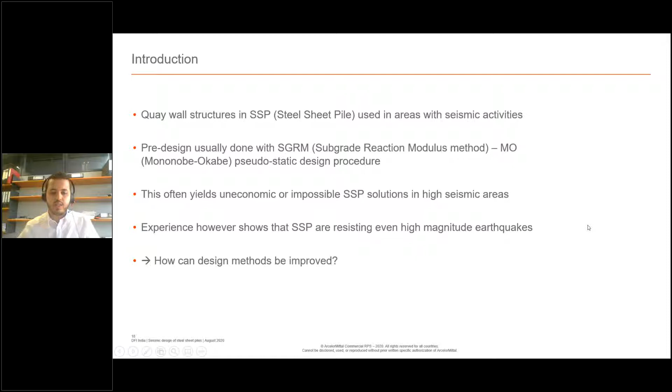I'd like to start with this success story in the port of Mejillones in Chile, constructed in 2004. This port structure was built after serious damage to the harbor installation of Antofagasta in the 8.1 magnitude earthquake in 1995. After this earthquake, authorities decided to construct the next port in the northern Mejillones Peninsula, and the breakwater was built using 8 circular cells, 24 meters in diameter and 24 meters in height, with a total breakwater length of 200 meters.

Also, one quay, quay 3, was built using the HZM sheet pile system with a total wall length of 620 meters. What we saw in the last years is that this port suffered no damage throughout a dozen very high seismic events. The most famous one was the 7.7 magnitude earthquake in 2007. The port suffered no damages, while surrounding concrete-based ports suffered heavy damages and were left in non-repairable state.

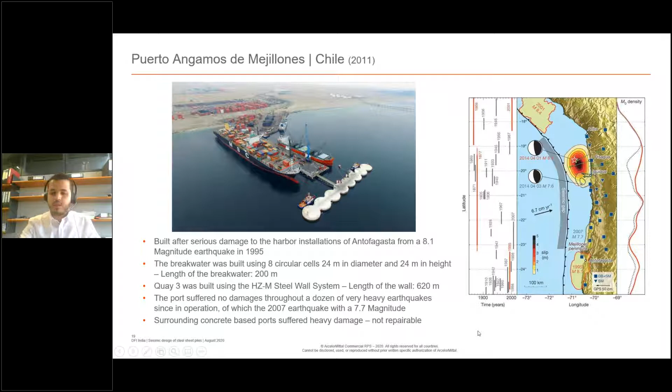This kind of return of experience is what encouraged us in this research to try to find the best design methods for sheet piles in seismic areas. So let me start with the design methods that we have today: mainly two, the pseudostatic one and the fully dynamic one.

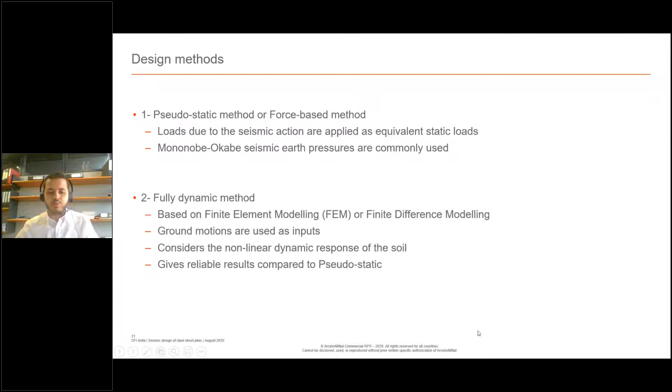In the pseudostatic method, the loads due to the seismic action are applied as an equivalent static load, mainly using the Mononobe Okabe seismic earth pressures. The fully dynamic method, however, is based on finite element modeling. We use ground motions as input, and we consider the realistic behavior of the soil using a nonlinear dynamic response. FEM in general gives more reliable results compared to pseudostatic, as we'll see later in the comparative studies.

Starting with the pseudostatic method: in static conditions, the earth pressure wedge is subject to acceleration of gravity only. In seismic conditions, we have an additional horizontal and vertical acceleration due to the earthquake, and we'll be more interested in the horizontal acceleration. The resultant acceleration is rotated by an angle theta related to the seismic acceleration. This method was initially developed by Okabe in 1926, and later by Mononobe and Matsuo in 1929, based on a modification of Coulomb's theory on earth pressures, known today as the Mononobe Okabe method.

Once we have this rotation of the model, we derive the earth pressure coefficients and apply the modified pressure for seismic conditions. To get this theta value, or equivalent rotation, we need coefficients kh and kv. We'll be more interested in the horizontal one, kh, because that impacts retaining walls more.

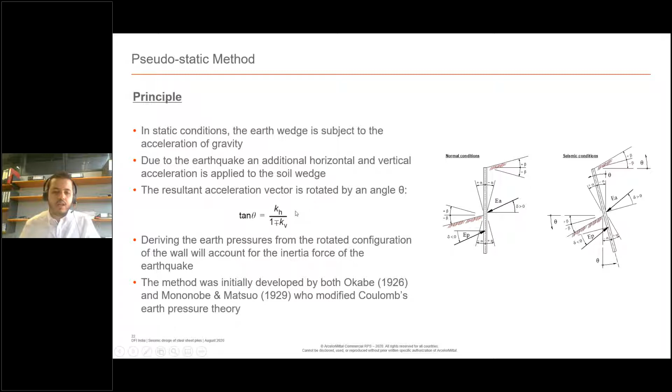And this is what is called the seismic coefficient. So to determine the seismic coefficient, we need to consider a particular standard.

Starting with the PIANC working group 34 recommendations, we have here a graph of some earthquakes and their equivalent seismic coefficient kh. If we look at the boundary below 0.2g acceleration, we have this line that describes the kh very well.

So below this bound, we just have the ratio between the seismic acceleration and the gravity acceleration. If we go beyond 0.2, we have a more complicated formula, but in the PIANC recommendations, we have an average value of 0.6 multiplied by the ratio between the seismic acceleration and the gravity acceleration. So this is basically the formula we use if we want to do our design based on PIANC recommendations.

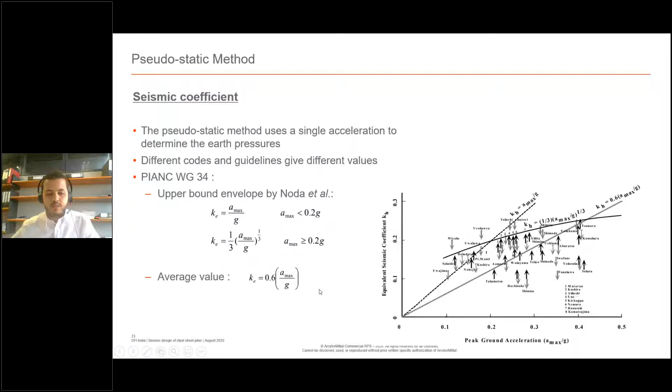Moving now to Eurocode 8, the European standard, we have a formula that is somehow similar because we also have the ratio between the seismic acceleration and the gravity acceleration. We also have a soil factor introduced here, which can range from 1 for soil type A, for rock for example, to even 1.7 or 1.8 for soft soil conditions.

But most importantly, we have here a reduction factor. This reduction factor is based on the acceptable displacements of the structure, as you see in the table. So if we have more acceptable displacements, we can have a higher reduction factor.

This factor can be seen, as stated in the designer's guide to Eurocode 8, as a way to consider ductility and adapt the safety factor to permanent displacements.

However, if you look closely at the table, you'll see we're only allowed this reduction for gravity walls. For sheet pile walls, for example, which would be considered as anchored walls, we were not allowed to use this reduction, which is a bit contradictory to the fact that we're supposed to consider the ductility of the sheet piles. This was actually criticized by many researchers and will probably be updated in the next update of Eurocode 8, which is ongoing now.

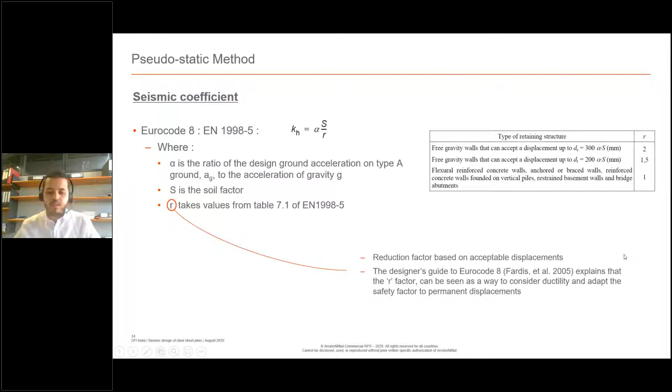We can further see this in newer European standards like the NTC 2018, which is an Italian standard. Here again, to determine the seismic coefficient, we have the seismic acceleration divided by the acceleration of gravity, but we have two reduction factors, alpha and beta.

So if we start with the beta factor, this would be equivalent to 1 divided by R, R being the factor we just saw from Eurocode.

So here we see we're going further, and furthermore we have another reduction factor depending on the deformability of the soil layers, which considers the asynchronous state of the seismic waves.

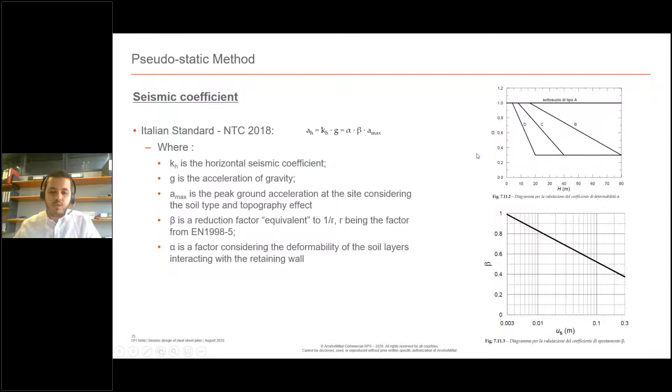If we look now at the Indian standard, we still have something similar in the same logic, with the ratio between the acceleration and the gravity acceleration. We also have a zone factor here, and a reduction factor R. We also have something very important, which is the importance factor.

This is pretty advanced considering the standard is pretty old, because this has something to do with performance-based design, and we'll come back to that later in this webinar. But we can see that more or less it's the same logic.

We have the seismic acceleration with some reduction factors, and from our experience, since we have to respect the condition of always being higher than the zone factor divided by 2, we almost always end up in this category, which would be equivalent to about a 50% reduction of the initial seismic acceleration.

So it's somehow similar to PIANC with 0.6 - here we have something like half of the acceleration.

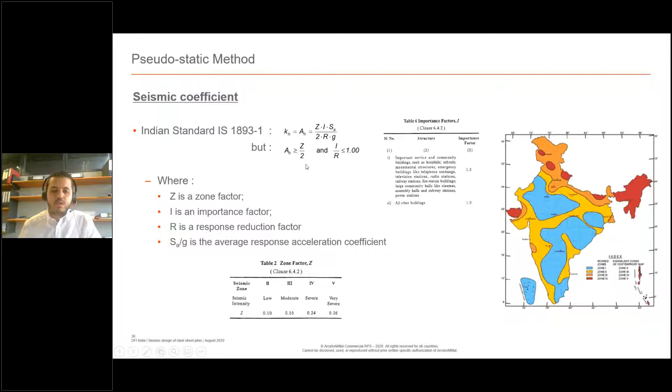So once we have the seismic coefficient KH, we can use it to get the rotation of our system, the equivalent rotation, and then we can go to calculating the earth pressure coefficients, the active earth pressure and the passive earth pressure. These are the Mononobe Okabe formulas used mainly for pseudostatic design.

There are other theories, more recent, like Lancellotta, Mylonakis, but still the Mononobe-Okabe one is the main one used. The assumptions of this method are that the soil should be dry and cohesionless.

The condition about the soil being dry can be overcome because we can calculate also the seismic coefficient for soil underwater. The second condition is that the movement of the wall should be sufficient to fully mobilize the shear resistance along the active or passive failure surface. Most importantly, the acceleration considered for this model is uniform across the retaining wall, which is also not very realistic because we always have varying acceleration that increases as we go up.

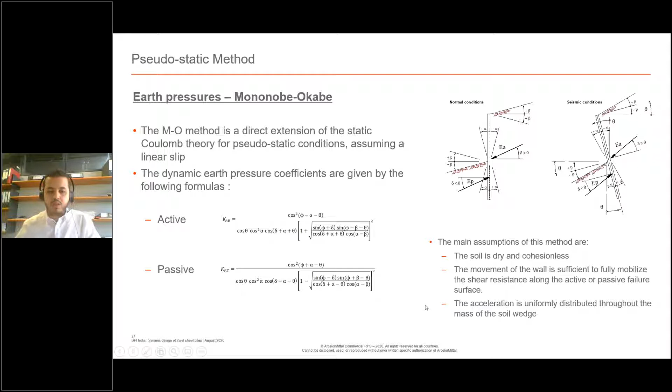So if you move now to the dynamic method, this method uses finite element software like Plaxis, Flac, Abaqus. We also have some open source software like OpenSees and LS-DYNA.

This kind of design requires a high level of knowledge and geotechnical understanding of the structure and the soil. But we believe that the software is becoming more and more user-friendly, and there are more available correlations from literature that simplify finding the numerical parameters needed. If you have a good understanding of soil behavior, you can achieve realistic modeling of the structure, and the result would be a reliable use of this method in a simple and quick way, even for pre-design, to get quick results before going to detailed design.

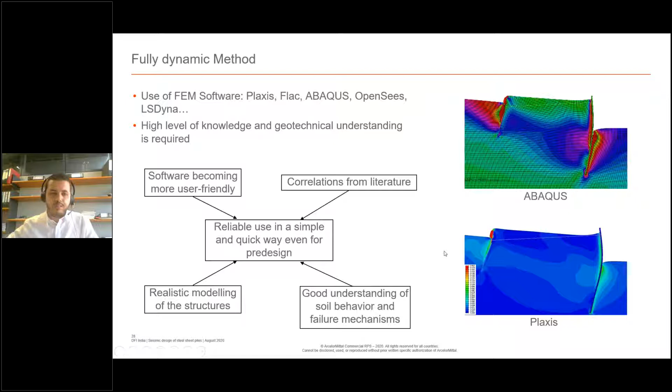If you want to look now at the specifics of dynamic design, one very important aspect is the soil constitutive model that you will be considering. This is even more important for dynamic calculations because you need to account for the nonlinear behavior of the soil.

The most known constitutive models are hardening soil small strain, Sanisand, PM4 Sand, PM4 Silt. There are many more being developed by researchers. The one we use when doing a Plaxis design is mostly HSS small. We believe this is a constitutive model that gives a good compromise between the accuracy of results and the complexity of parameters. We find that it's a constitutive model suitable for industrial use.

We see here the parameters needed for hardening soil small strain. The first two parameters are just the weight of the soil, so easily available. Then we have three stiffness parameters that are also easily available from oedometer tests. For example, we have here a numerical parameter that, from my knowledge, takes only two values, either 0.5 or 1, depending on the soil. Friction angle and cohesion are also very easily available and very important ones.

Also, we have the Poisson ratio, and then two parameters: the shear stiffness and the strain at 70% of the shear stiffness. These are the most complex ones. These two parameters help us define the reduction curve. We need to redefine this curve because we have the reduction of stiffness that needs to be accounted for at higher strain. So this model accounts for strong stiffness variation with increasing shear strain amplitudes, especially in the domain of small strains. We also have the hysteretic nonlinear elastic stress-strain relationship, which is also applicable in the range of small strain.

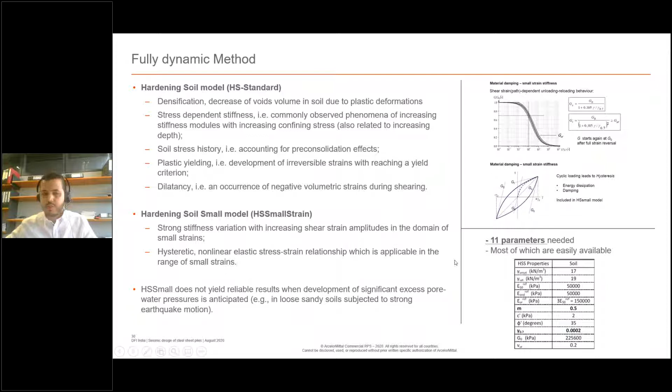Another aspect that is very important is the geometry of the model and the mesh.

Generally, we would like to have the boundaries far enough from the model to not interact with the model itself. So the general recommendation is to have a model that is 5 times larger than the height of the model.

Concerning the mesh size, we also have some conditions to respect. The first is that mesh elements should be small relative to wavelength. It will depend on the mode you are using: if using a 6-noded mode, you would need mesh elements 10 times smaller, and if it's 15-noded, the recommendation is 5 times smaller. A practical tip: look for the lowest expected wavelength and have your element 10 times smaller than that wavelength.

The second condition is that the fastest shear wave should not travel more than one element during one substep. If your wave travels a certain distance during one substep, it should not be larger than the mesh element, otherwise your element would completely miss the wave going through it, and we don't want that happening. So we end up with an interval for our mesh size: it should be higher than this distance and lower than the wavelength.

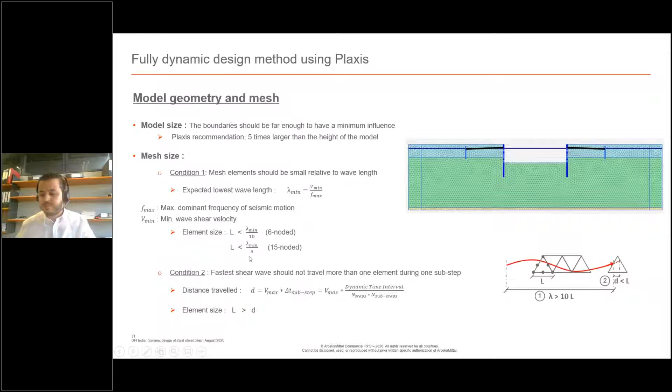Another aspect is the boundary conditions, because if you use your model without caring about boundary conditions, waves would reflect at the boundaries. In reality waves do not reflect, they go to infinity. So we need some kind of absorbent boundaries that reflect this reality.

In practice, what we use in Plaxis, and the best boundary conditions, are tied degrees of freedom. This can be used in 1D models especially, but also in 2D models, especially if you have a symmetrical model. If you don't have a symmetrical model, for example if you stop the model in the middle with the excavation level here and the ground level there, you will not have the same nodes at the right boundary and the left boundary, and then it's advised to use free field conditions.

For the bottom boundary condition, we use a compliant base, which is simply a boundary condition that allows absorbing the waves coming from the top, that are reflected at the top and coming back down. They need to be absorbed, and this also allows us to introduce the ground motion.

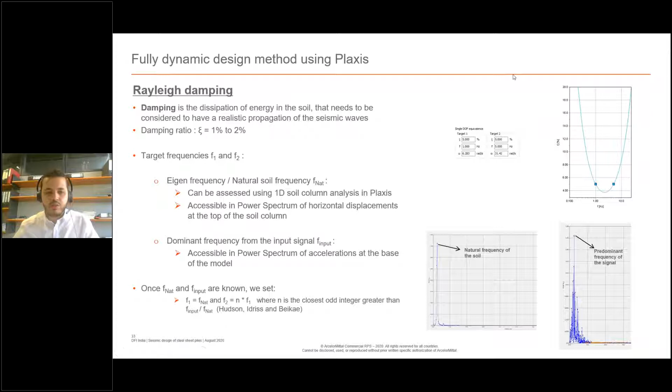I'd like to go back to the ground motions. So concerning the ground motions that we will be using at the bottom of our model, they need to respect some conditions. I'm just waiting here for the slide to come back. The ground motions... okay, sorry.

So as I was saying, the ground motions need to respect some conditions. We need to be aware that the outcropping motion usually has an upward wave and a downward wave, so that's double the amplitude we will have at the bottom of our model, which will only have the upward wave. That's why we need to consider a factor of 0.5 when using the ground motion.

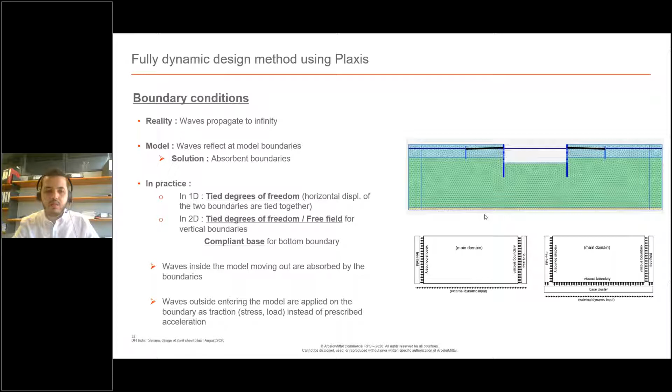Sorry, I'm just getting aware this is not the right slide. The one about the ground motions, please. Yes, thank you.

So as I was saying, the outcrop motion here has an upward wave and a downward wave, so it would have double the amplitude of the motion that we are introducing at the bottom of our model, where we only have the upward wave going through the model. That's why we need a value of 0.5 for the dynamic multiplier.

So these are some conditions given on the ground motions that need to be considered. Once the ground motion is fitted to a certain spectrum, we can also use it for the PGA that we have for our project, simply by scaling the signal to the required PGA.

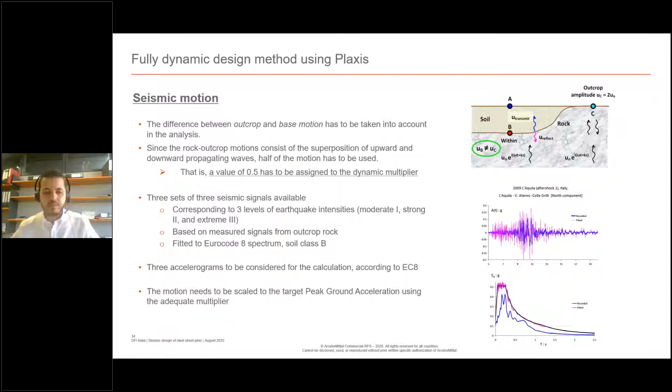Another aspect is the hydrodynamic loads, and for that we need to consider special aspects. We can model the hydrodynamic loads using the added masses approach, where we attach certain masses to the plates modeled in our sheet piles, so that the hydrodynamic effects are simulated by the inertia forces associated with these masses.

In practice, what we do in Plaxis is we have different plates along the length of the sheet pile, and we simply change the mass, the weight of the plate, without touching the stiffness parameters. We can also use acoustic elements to simulate the water, but this is unfortunately not available in Plaxis and can be used, for example, with the Abaqus software.

From what we've seen in previous studies, the effects of hydrodynamic loads, when modeled right, should not exceed 5 to 10%, and should not affect the bending moments by more than 5 to 10%.

This is what we sometimes see, we've seen it before with certain projects. When we model the Westergaard load as a static load on the dynamic phase, we end up overestimating the bending moments, and this is not correct.

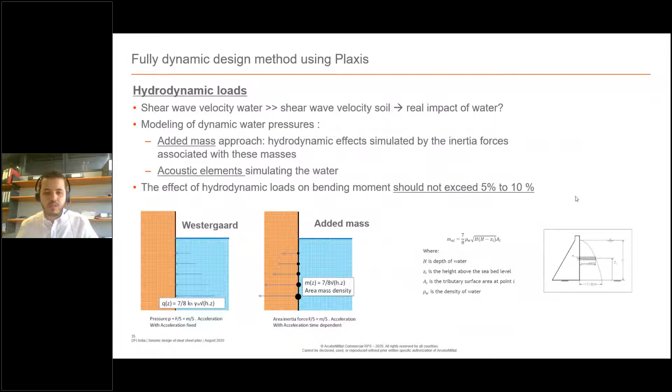I would like to end with some practical tips about the dynamic design, to conclude this part about dynamic design.

It is advised to use a mirrored geometry to examine the effect of the ground motion in both directions in only one calculation, saving time. It's also advised to use 6-noded elements instead of 15-noded elements to save time, and the undrained A mode is advised in these cases.

We can also use dummy lines, as you see here, near the boundaries, in order to have proper alignments for the boundary conditions, so we can use the tied degrees of freedom boundary condition.

Now I would like to present an animation about what's happening during an earthquake when doing a finite element design in Plaxis. Let's see the animation, please.

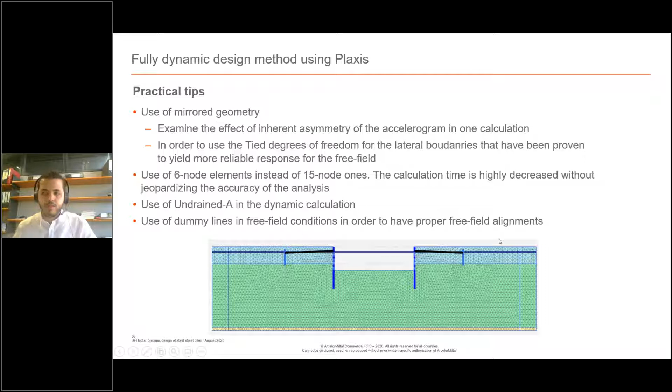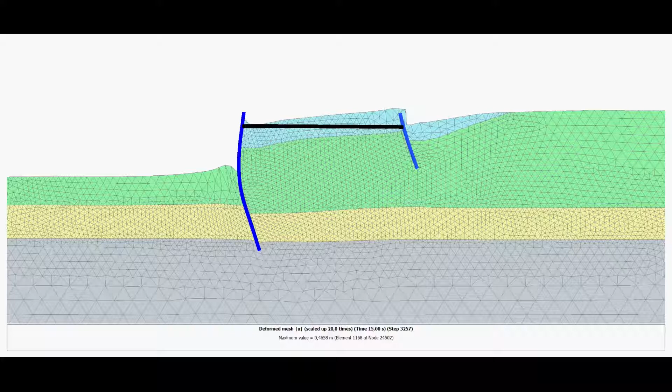I would just like you to pay attention to the whole soil body moving. Of course this is exaggerated, I think it's scaled up 20 times, but this is in order to see what's happening during the earthquake. What's important to mention is that in a given second, the whole soil body will be moving, for example, over 20 centimeters.

So it's not reasonable, for example, to ask as a deformation condition that the sheet piles respect a deformation limit of 20 centimeters if the whole soil body is moving by more than that. That's why it's important to see what's really happening, and this is something we'll come back to in the performance-based design, to consider what is really important for the structure when defining the deformation limit.

Now I'll move to some comparative studies done in recent years, starting with the study from Professor Gazetas, where he investigated the seismic response of sheet pile retaining walls.

Using the given geometry, he considered dynamic calculations using both Abaqus and Plaxis software, also comparing them to pseudostatic calculations using RIDO. For his design, he considered 3 outcrop motions for each level of earthquake, so at the end he has 9 motions, with different soil conditions as well.

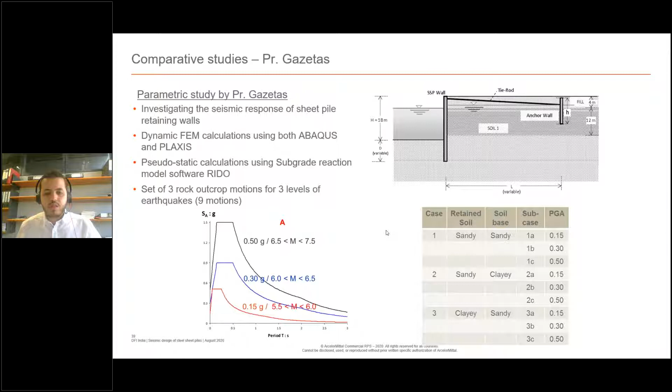If you look at the second case of 0.30g, we have a further increase in bending moments, an overestimation of about 60 to 70%.

Looking at the last case of 0.50g, you might think it's closer to the bending moments of Plaxis and Abaqus, but in reality we could not do the calculation for 0.5g because the pseudostatic calculation was only valid up to 0.4, and we couldn't use the Mononobe-Okabe formula for 0.5. Now looking at the deformations, next slide, please.

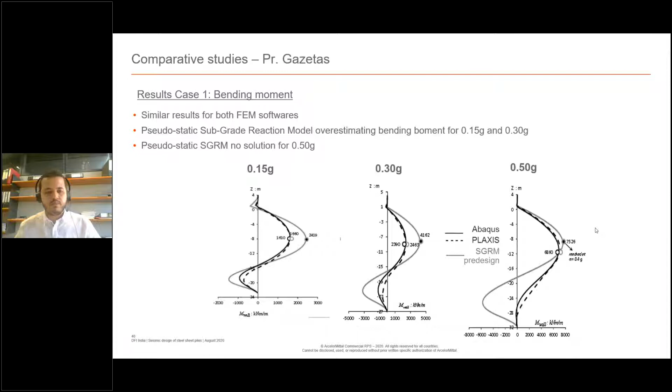In the second case, however, it goes a little bit over the calculations from finite element modeling, and Plaxis and Abaqus are matching quite well.

For 0.5 g here, this is only for 0.4 in pseudostatic, so we do not have the results for 0.5, but we see a big difference between Plaxis and Abaqus. This might be due to some anchor failure in this particular Plaxis calculation that led to the sheet pile moving too much, but it can also come from the soil constitutive models used and differences that can exist between the two finite element software.

Moving now to the next study and the most recent study. Next slide, please.

In this study, with our partner consultant from Spain, Sener, they also compared seismic performance of sheet piles using the pseudostatic method and the dynamic method.

In this study we wanted to cover a wide range of geometries, so we considered 4 different water depths for our cases. The total cases were 11, subdivided into 3 categories. For the first category, we had 2 water depths with low seismic acceleration. For the second case, we had 4 water depths with rather high seismic accelerations. And in the third one, we wanted really to push to the limit, considering very high seismic acceleration in soft soil conditions, to really test the limit of the methods.

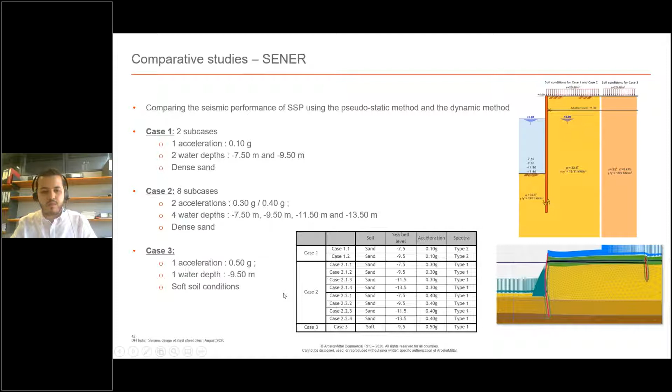Moving to the next slide now, with the results from case 2.2. Next slide, please. So looking at the results now, thank you.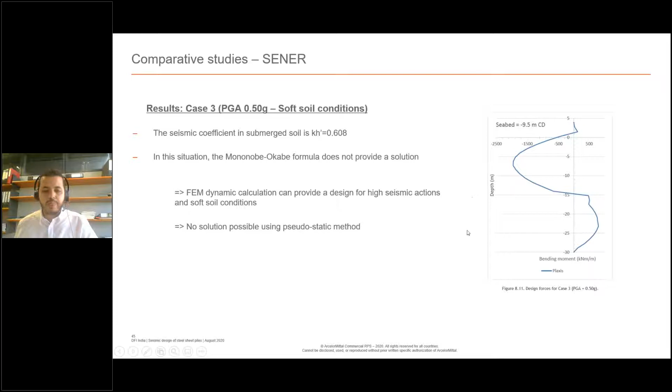Moving now to a very important topic, which is performance-based design when talking about seismic calculations. This is a rational approach to the design of structures that often yields very good results compared to conventional design methods. In this approach, the consultant design engineer works together with the owner to identify specific structural performance objectives for serviceability and for strength. Then the structure is designed to ensure compliance with these agreed objectives.

In practice, this means we define a certain grade for our structure. Looking at the graph here from PIANC, you have 4 different grades. For example, defining a grade S, the most important one, meaning the structure is very important, we also need to define 2 levels of earthquakes, level 1 and level 2. Usually level 1 will be the 72-year return period earthquake, and level 2 would be something like the 475-year return period. Once we define the grade and the earthquake levels, we also define the performance criteria and the level of damage expected for this given structure for each earthquake.

For example, if we decide that our quay wall will be grade S, that means that for a level 2 earthquake already defined, say 0.5 g PGA, we will not accept anything more than repairable damage for this earthquake. Of course you need to be aware this comes with a cost. The project owner needs to be aware that if he's asking for this grade, he may need a heavy structure, a heavy solution.

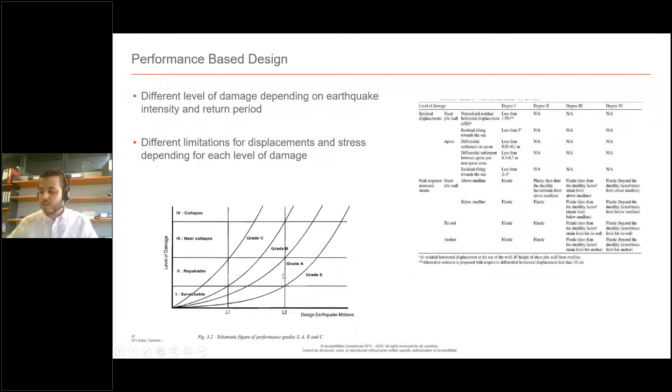A practical example is the 3 ports that were designed on the west coast of the US: the port of Los Angeles, Long Beach, and the port of Alaska. They have all been designed according to performance-based design.

So there were 3 levels of earthquake defined for this design. The first was the 72-year return period earthquake. The second was the 475-year return period, and the third was a very extreme one with a 2,475-year return period.

Once we define these levels of earthquake, we also define the performance criteria associated with them. For the operating level earthquake, the criteria was that no interruption to operations shall occur, and no significant structural damage. Any damage should be aesthetical, observable, and quickly repairable.

For the second level of earthquake, the performance criteria was a brief and temporary loss of functionality, with all functions restored within a few months. We also accept permanent deformations, but in a controlled way, so it's important to keep that in mind.

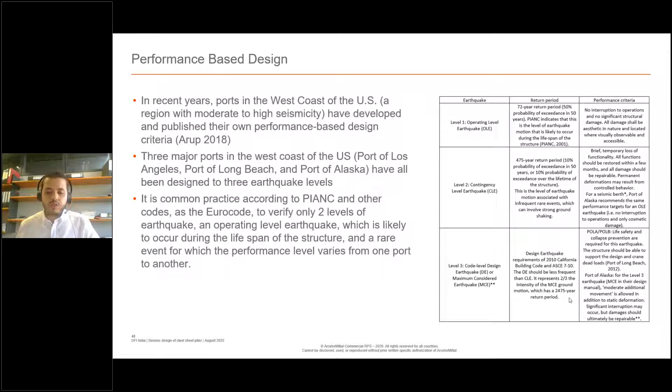When talking about performance-based design, we also have to talk about damage criteria, since performance criteria need to be based on damage criteria. Looking at the Japanese standard, for structures with no repairs needed, the deformation limitations are 30 centimeters for shallow structures and 50 centimeters for deep structures.

But more importantly, we need to be careful about differential displacements, with a defined limit of 30 centimeters. As shown in the animation, it's only reasonable to look at differential displacements rather than the maximum deformation of the sheet pile, because if the whole soil body is moving, it's not reasonable to look only at an absolute value.

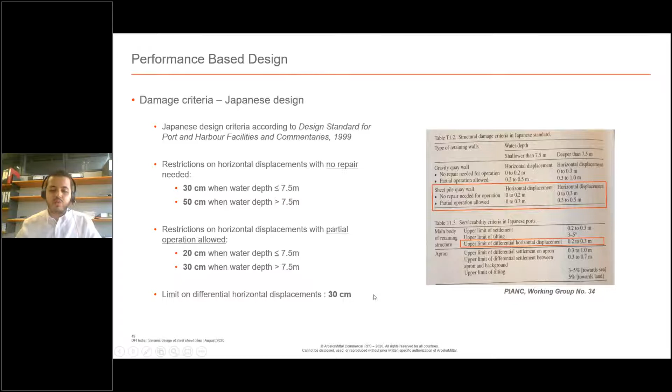Looking now at Working Group 34 of PIANC, we again have a criteria given by a percentage of the height of the wall and the tilting of the sheet piles. But again, we find the differential horizontal displacement limit that needs to be respected, which is 30 centimeters.

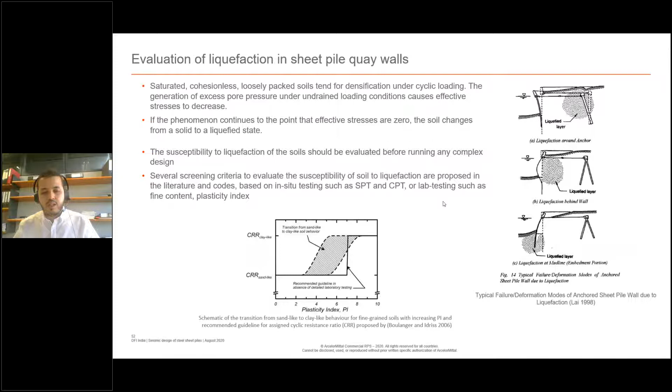This can be due to two effects: first, the seepage below the dike, and also there could be some kind of liquefaction that causes the dike to completely fail and be swept.

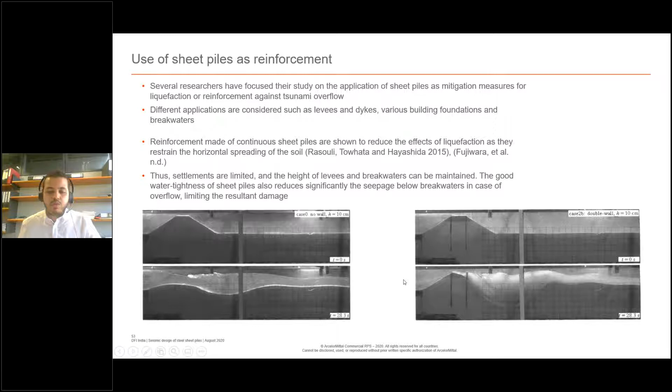This can be explained by two things. The sheet pile is keeping the seepage from going below the breakwater, and also - and it's a subject of many research now - the sheet pile double walls can also be used as a mitigation against liquefaction.

We will see now a very realistic, in reality example of this in the tsunami that happened in Kamaishi, in the region of Iwate in Japan. This tsunami happened after a 9.1 magnitude earthquake.

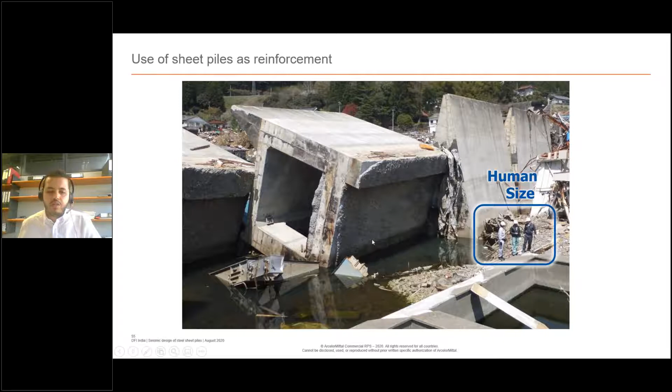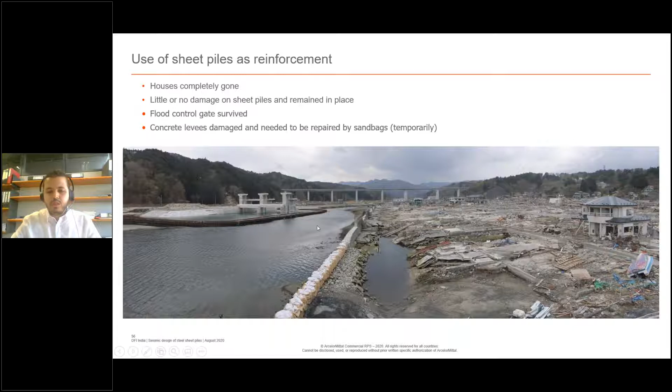So if you want to try to understand what's happened here, we can look at another picture now of the sheet piles closely. We can also see here that, again, with a close picture, no damage occurred on the sheet pile wall. We can say that it completely protected the cofferdam from liquefaction.

As I said before, there are many researchers now looking at this topic of double sheet pile walls mitigation effects against liquefaction, because it is believed that the soil trapped between the two sheet piles is somehow separated from the soil that is shaking, and also we cut off the excessive pore water pressure, and it can be a very effective mitigation against liquefaction.

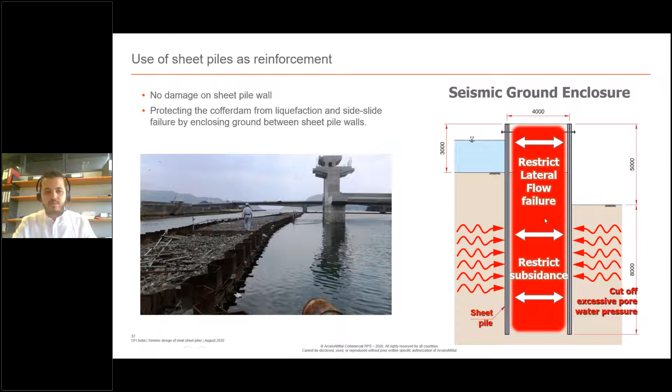So I would like to end this webinar by presenting some of the publications that are foreseen for the near future by ourselves. So first, the Seismic Sheet Pile Handbook.

So this document will be published very soon, and it has the general recommendations on seismic design of sheet piles. It was drafted in collaboration with the University of Cambridge, University of Rome, also based on the results of our studies with SENER, with Professor Gazetas as well. It also includes a step-by-step tutorial with a work example in Plaxis, and gives further detailed instructions on design and recommendations. This will be published soon, so if you're interested, do not hesitate to get in touch with us to get a copy as soon as it's published.

Also, the Seismic Design Brochure, this 4 page document that condenses the results of the SENER studies that were done. In this webinar, I only mentioned the results of the last study, which was about comparing dynamic and pseudostatic methods, but we also had previous studies about hydrodynamic loads and also about general methodology of sheet pile design. In this brochure, you can find also some elements about the previous studies with SENER.

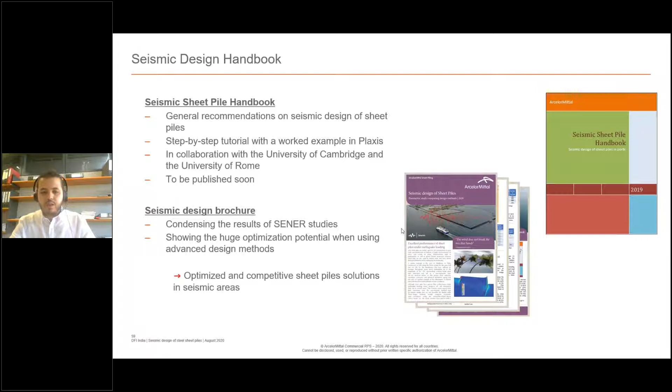To conclude this webinar, I would like to say again that the conventional Mononobe Okabe approach using pseudostatic design is not suitable for sheet pile solutions, especially for high seismic areas. We've proven it, and we've seen it now, and it's simply related to the formula itself. We advise using dynamic methods with finite element software to allow for more realistic modeling of the soil, also taking into account the non-linearity of the soil and all the aspects previously mentioned. However, this of course needs know-how and some kind of knowledge about geotechnical and structural engineering, also knowing the parameters and how they influence the design.

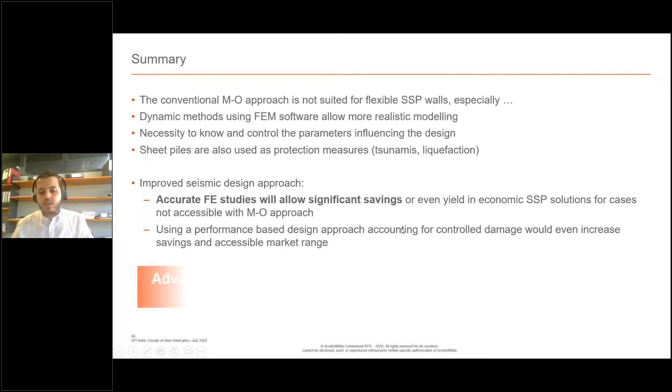We've also seen that sheet piles can be used as protection measures in cases of tsunami, for example, and liquefaction. All in all, I would say that if you are using accurate FE finite element studies, this will allow significant savings and can even yield economical sheet pile solutions in some areas where we cannot even achieve a solution using pseudostatic design. Also, if we combine this with the performance-based design approach that accounts for controlled damage, that would even increase the savings and make it accessible for sheet piles to a wider market range.

So if I want to summarize, the main message today is that if we are using advanced design methods in an efficient way, we're sure that we'll yield economical sheet pile solutions in high seismic areas. So thank you for your attention, and I'm available for your questions now. And thanks again.

My origin is somewhere in the depths of the earth, and my story began billions of years ago, when I was born in a blaze of fire. I helped you survive through the ages. I've changed the way you work, and I've changed the way you live. I've been part of mankind's greatest achievements. I allowed you to expand your frontiers, to explore the land, the water, the skies, and even the universe. Throughout the centuries, I was reborn again and again. I'm known for stability and strength. My quantity is measured in millions of tons, but my quality is defined in millionths of an inch. I've stretched the possibilities of human imagination. I've inspired you to shape your visions and reach new heights. Once I'm back to where I came from, I can become virtually anything you can imagine. I am more versatile than I have ever been before. I'm always with you. I'll protect you and guide you. I'm all around the globe, wherever you go. I'm everywhere and will always be. I am the engine of innovation. I am the pulse of the modern world. And you'll build your future on me, because I am steel, the fabric of life.

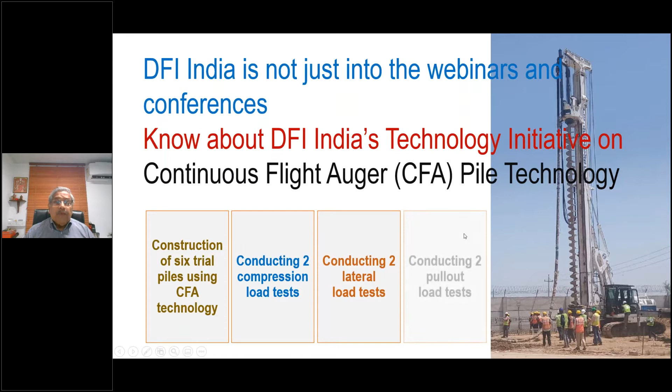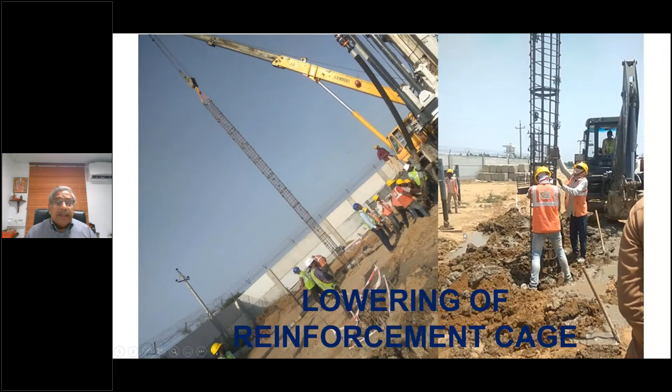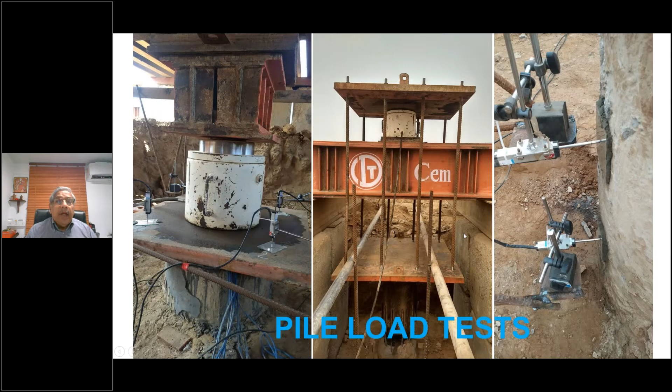Now, to move on to a different topic, DFI also has other initiatives. One I'm going to talk about is the continuous flight auger technology for installation of piles. DFI has taken this initiative, gone through trials, done some tests, and these are pictures from the actual job - a pilot project on pile testing done in India. These are quick snapshots of piles we have done, with documentation completed. The piles have been tested for vertical downward pull-out as well as lateral loading, and we have the documents all available on our website.